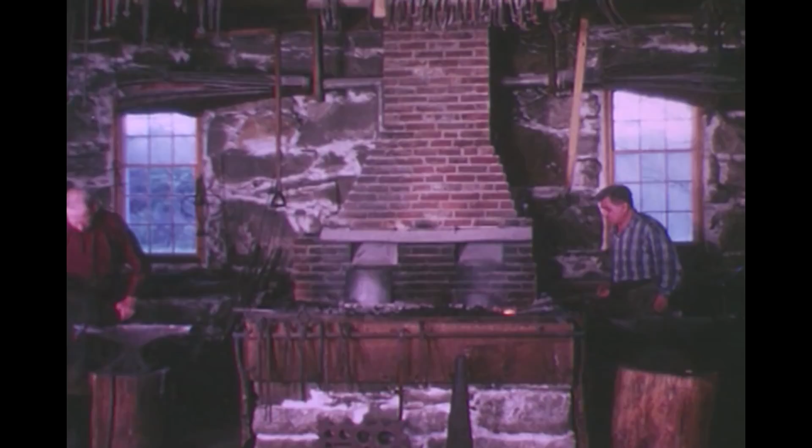Forging is one of our oldest metalworking arts. The old method of heating metal to cherry red has been developed into an exacting science, employing modern instruments and new metallurgical knowledge. Muscle power has been multiplied and is now measured in tons of force, which pound or squeeze all kinds of metals into a multitude of shapes.

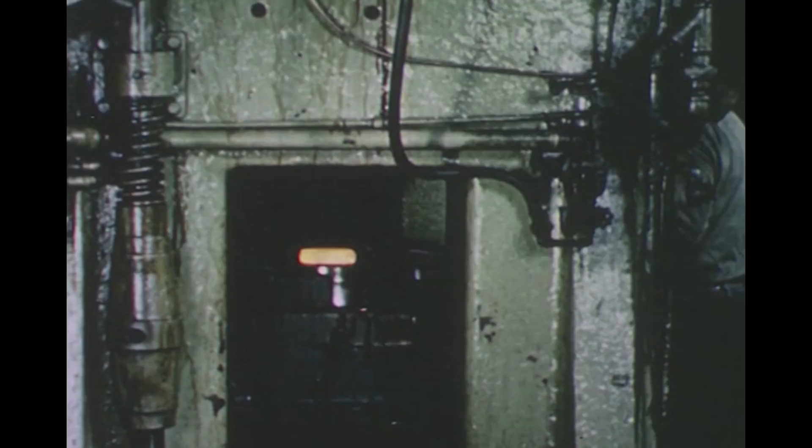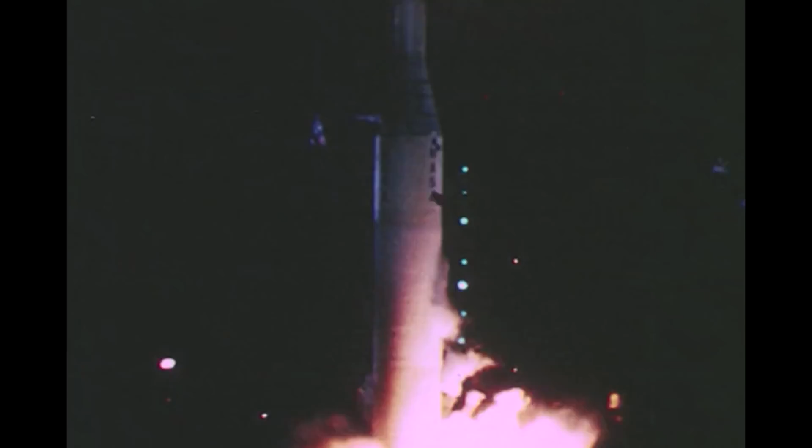The development of modern transportation has been furthered by advances in forging techniques. In our conquest of the air, forging knowledge and new kinds of forging equipment are providing components essential to efficient progress. And now, as we reach out into space, we are more than ever dependent on knowledge of metals and the techniques for forging lighter and stronger materials, new and unusual metals with new and unusual processes, so that we may then become the blacksmith for the stars.

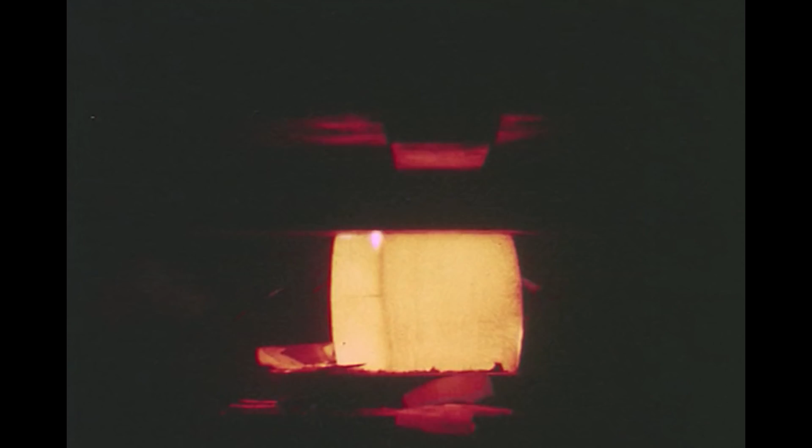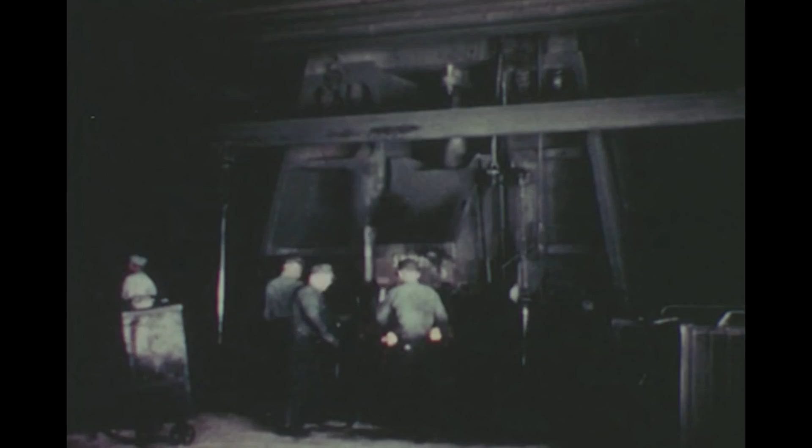For over 75 years, Wyman Gordon has pioneered in the forging industry. Experience, knowledge, and skill acquired since 1883 are combined with the latest in forging and scientific equipment to answer the forging problems of our atomic and satellite age, and to answer them today.

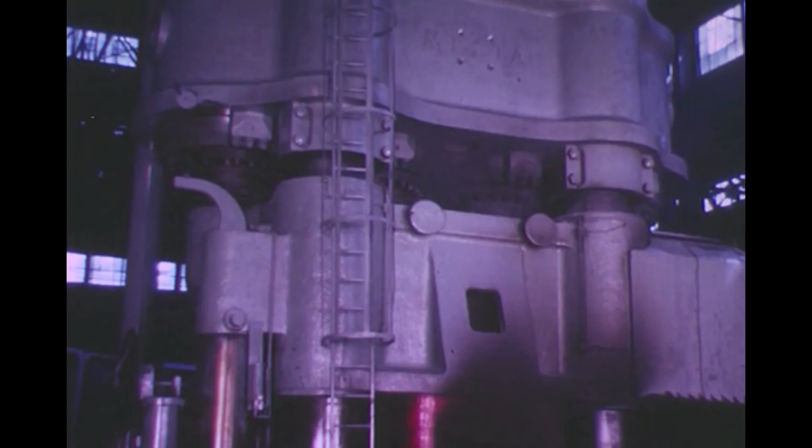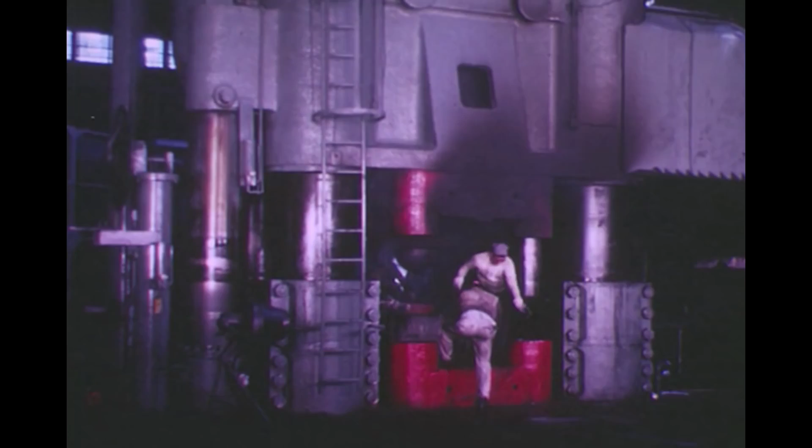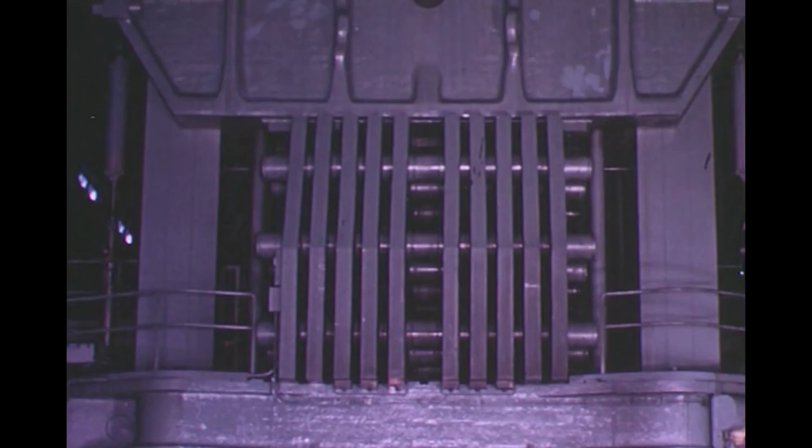In 1946, Wyman Gordon began operation of an 18,000-ton press for the Air Force in their North Grafton plant. This was the first of America's heavy presses to play a leading role in light metal forgings for aircraft. As the need for larger aircraft forgings became more evident, this 35,000-ton press was put into operation in 1955. This equipment provided a great increase in our country's capability for larger, stronger, and more intricate aircraft components.

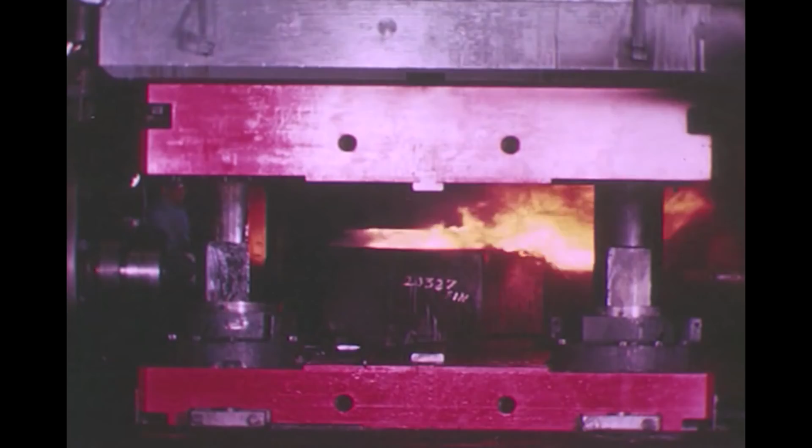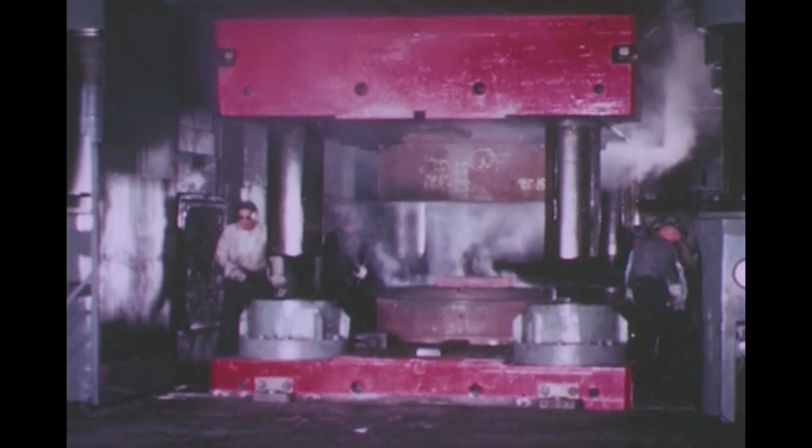Six months later, even greater capability was provided in the 50,000-ton press. These heavy presses were originally built to produce larger and more massive forgings of light alloy material. Increasing challenge came with the rapid growth of our missile program. To withstand the shock and stress of takeoff and supersonic speeds, the eroding fire of propellants, and the incandescent heat of atmospheric re-entry required a new family of materials. Wyman Gordon was ready with an extensive research and development program and with manufacturing capabilities and experience to accomplish the development of these new forgings of new materials.

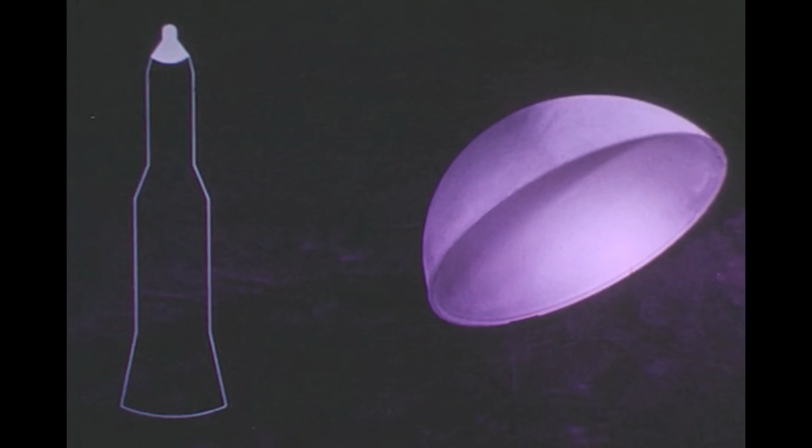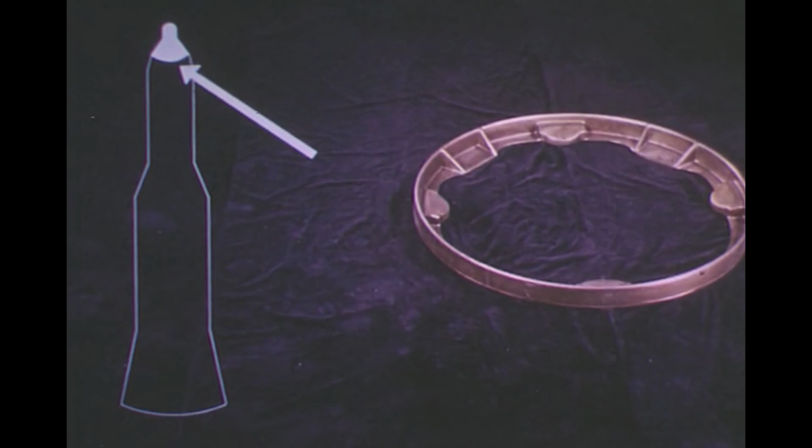Many components are already being forged for some of our well-known and successful missile and space vehicles. This missile nose component of beryllium is but one. Others include this dome forging of copper and a nose cone structure of magnesium. Components of aluminum and magnesium offer strength and light weight for the support of missile guidance systems. Many high-strength steel and titanium alloys are being forged today for rocket motor cases, such as these forward and aft closures for solid propellant motors.

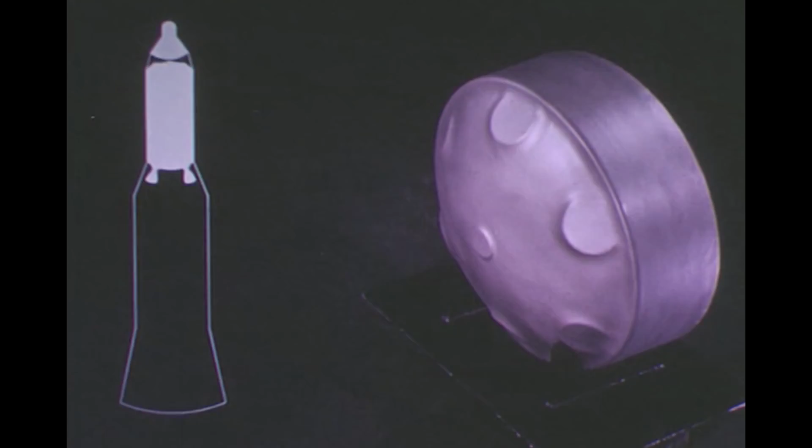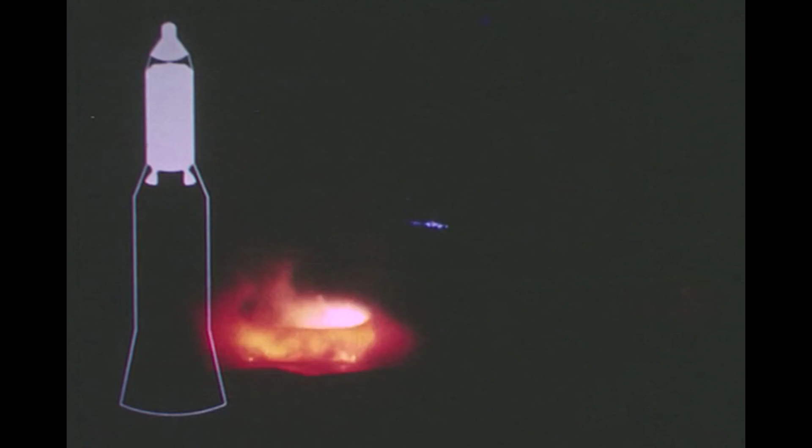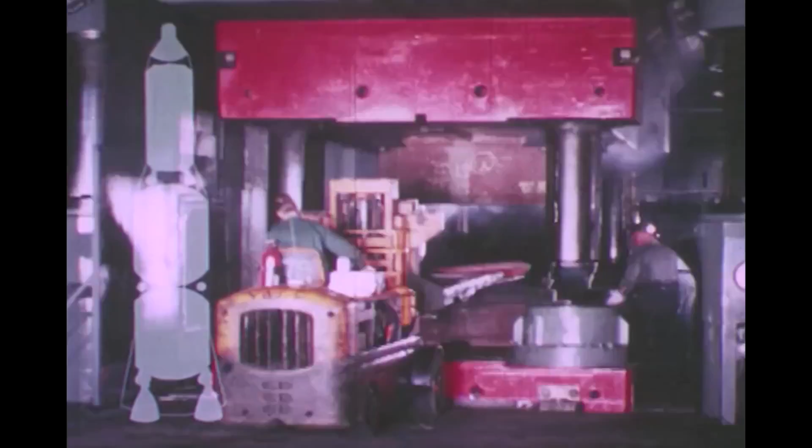Motor nozzle housings of titanium alloys are forged to provide a high strength-to-weight ratio. Refractory metals, such as molybdenum and tungsten, are forged for other nozzle applications. Liquid propellant tank parts, such as this aluminum bowl, are being currently forged, as are the parts of this titanium pressure vessel. Turbine engine parts are forged in high-strength nickel base alloys, such as this wheel of Rene 41 and this machined one of Astroloy.

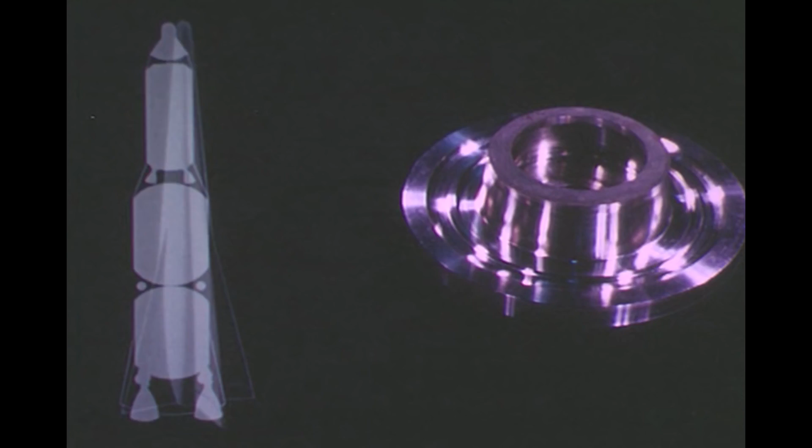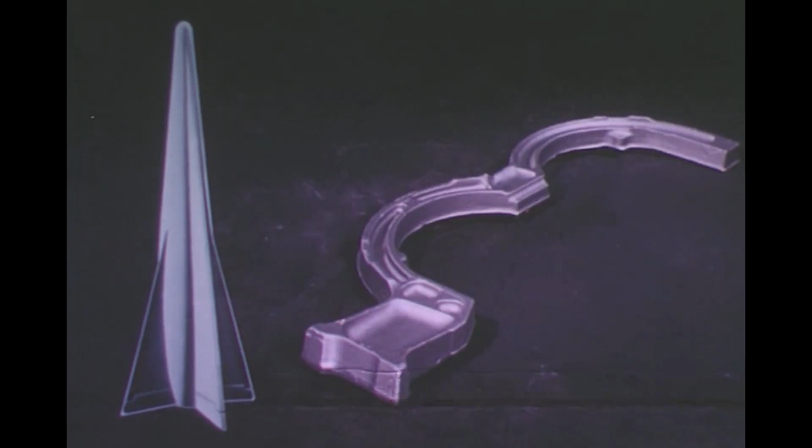Many other forgings are now being produced for the many missiles, rockets, and glide re-entry vehicles successfully proved and under development. And the list of metals includes magnesium, beryllium, aluminum, titanium, zirconium, steel, copper, columbium, tantalum, tungsten, and other nuclear and space materials.

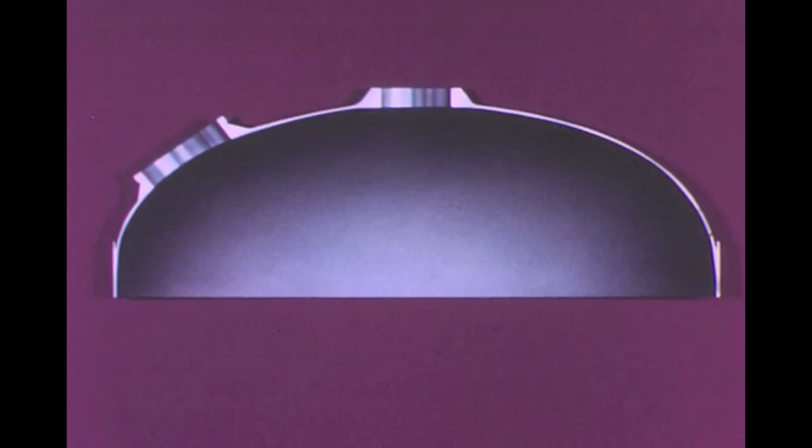The ultimate product performance requires partnership of experienced forging engineers with the product designers from the beginning of design activity. Wyman Gordon engineers, together with the customer engineering personnel, study the geometry of this model section of the forward head on a rocket motor casing of a long-range ballistic missile. Here they work backwards from the finished piece to the raw material which they will need to forge it. They review together the performance required, the metallurgical properties, the tolerances, the location of bosses, the surface finish requirements, and other essential characteristics of eventual design.

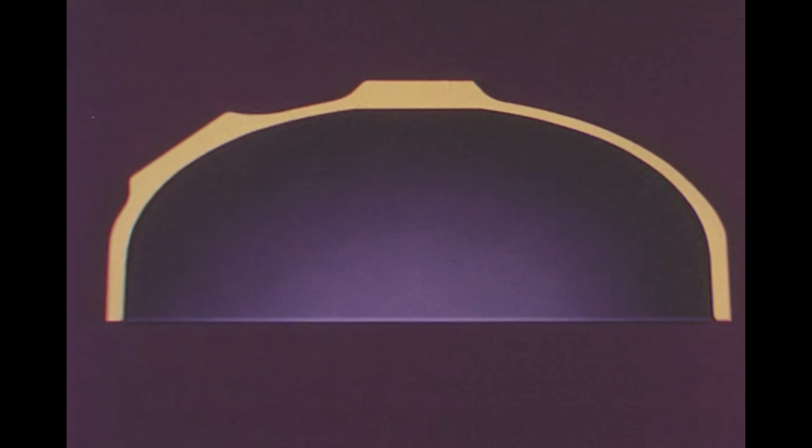Machining requirements are studied in advance. Experienced forging engineers must take into account the character of the forging processes as well as the end product requirements in order to provide the most effective forging design. The forging die designer, with his knowledge of metal deformation, determines the forging steps required to produce the part as well as the most appropriate size and shape of the beginning raw stock.

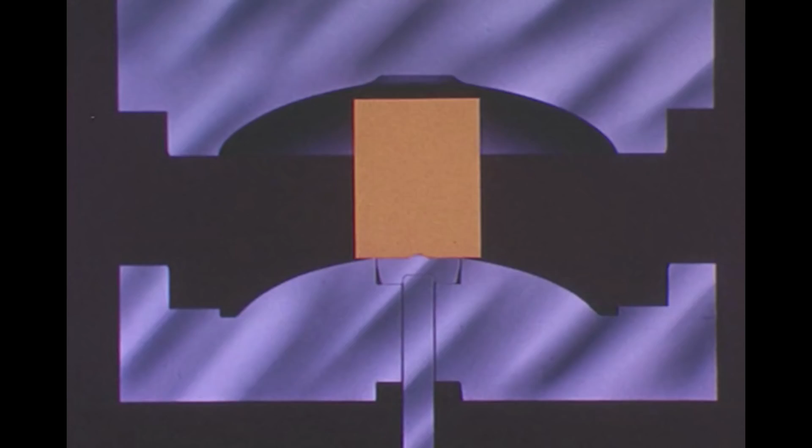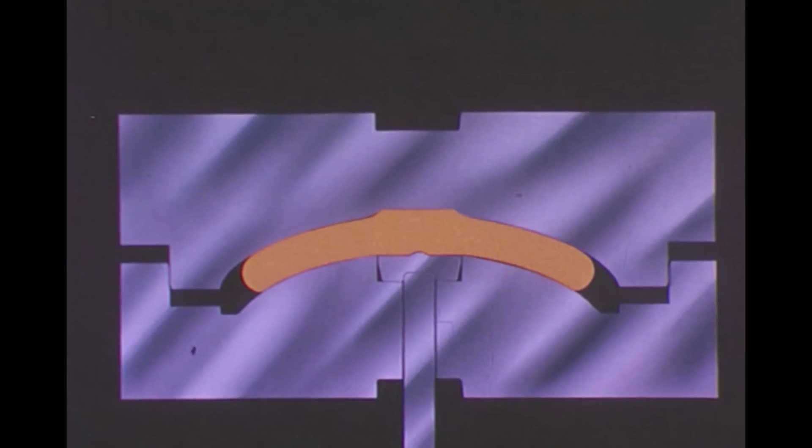Specific die designs are worked out by development teams consisting of personnel from the laboratory, engineering, forge shop, and die shop. All requirements of the job are considered, such as forging temperatures and pressures for each operation, and the amount of heating required. The engineers determined that this part would require 2 forging steps. The first set of dies perform a preliminary operation. Then a second set of dies perform the finished forging, providing a part which has all of the structural and metallurgical properties required.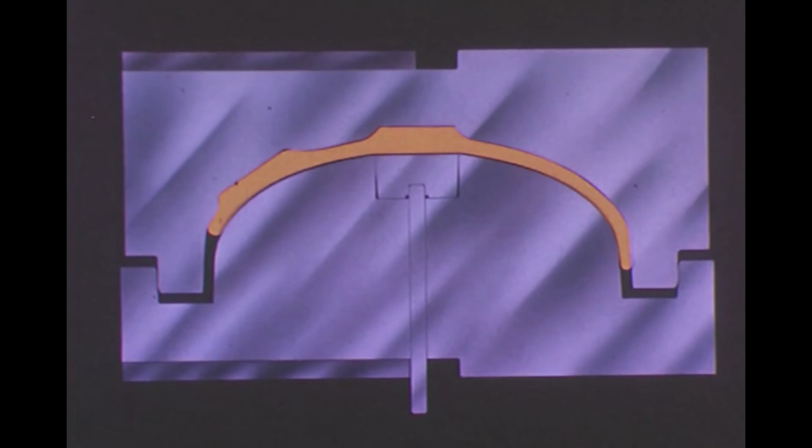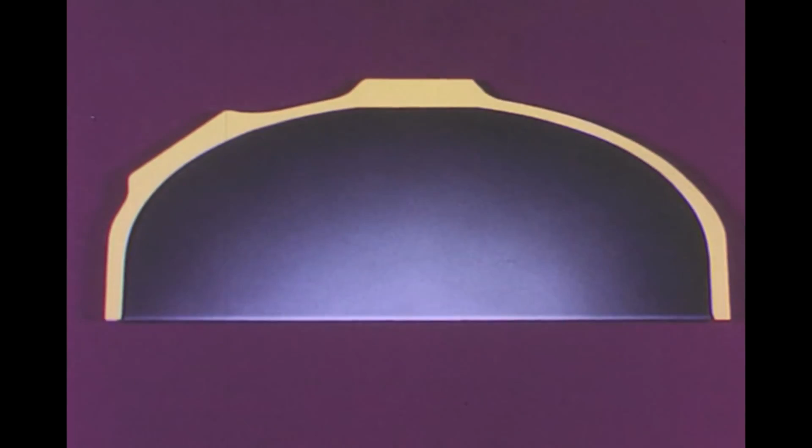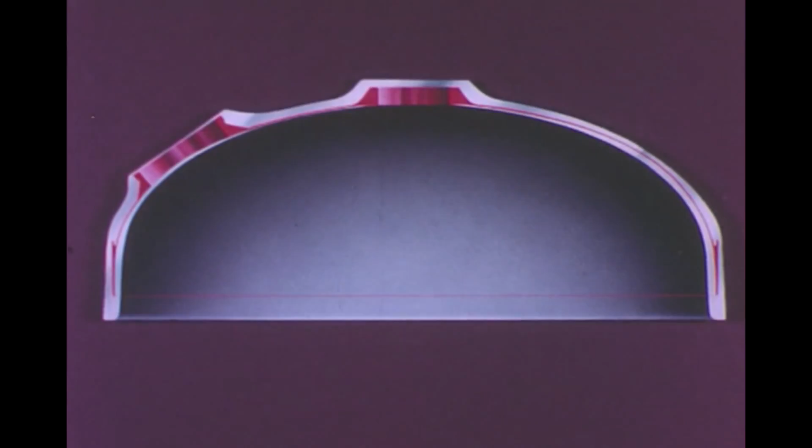Material at the rim of the bowl is removed for testing purposes, and the finished forging is machined to the required close tolerance. When missile engineers work with Wyman Gordon, from the research and development stages through to the final production, the best possible component can be produced, taking into account design requirements, material utilization, producibility, and total cost.

But to provide dependable forgings, many related activities must be tied together. The laboratory constantly analyzes raw material to be certain it meets all specifications. Difficult performance specifications and the high cost of many of the new metals being forged today require extensive testing of both raw material and finished forging.

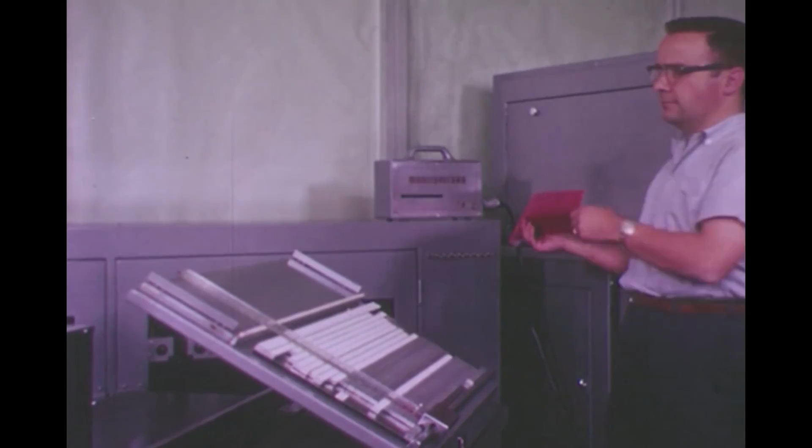Spectrography is one method used to determine the elements present in a material. By burning a sample and analyzing the light emitted, the direct reading spectrometer gives a permanent record of alloying or impurity elements. In addition to a chemical analysis to determine metal content, a sample is etched to check the macrostructure of the cast ingot or billet stock.

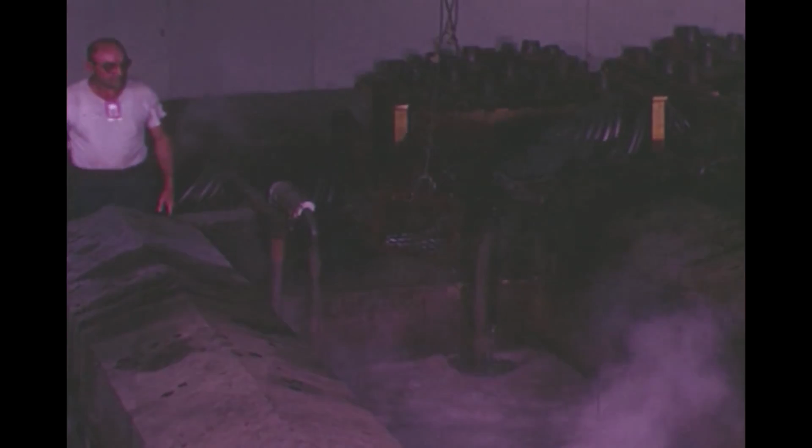Macro etching proves the absence of columnar grain, segregation of local areas of excessive alloying elements, metals or nonmetallics, or porosity due to gas entrapped in the material. These checks also help indicate how the material should be worked in preliminary operations to avoid internal rupturing or laps during forging.

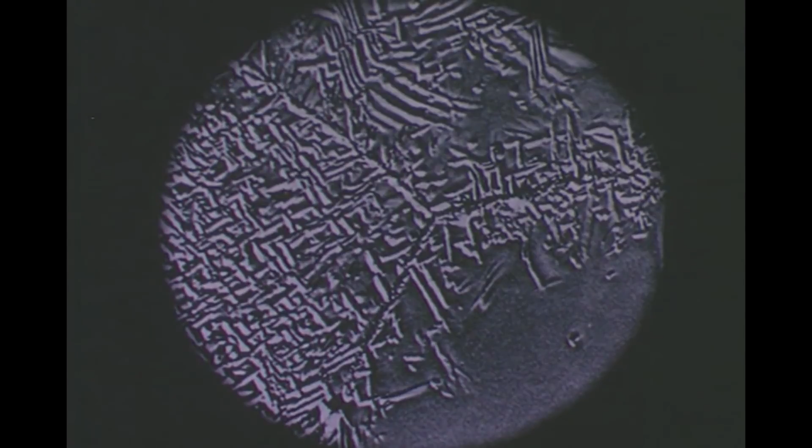The electron microscope is a metallurgical development tool used to study and evaluate the effects of processing variations on the structure of materials. These electron micrographs of a titanium alloy with an original magnification of 12,500 times show the structure and alignment of aging precipitate. This uniform, fine, randomly oriented precipitate indicates proper working and heat treatment.

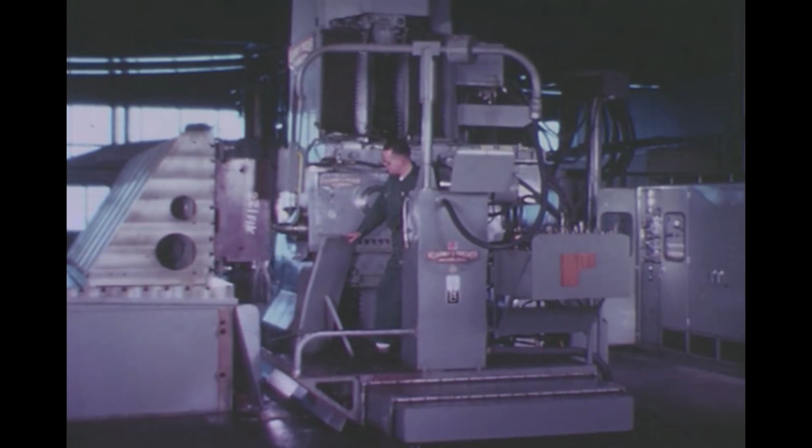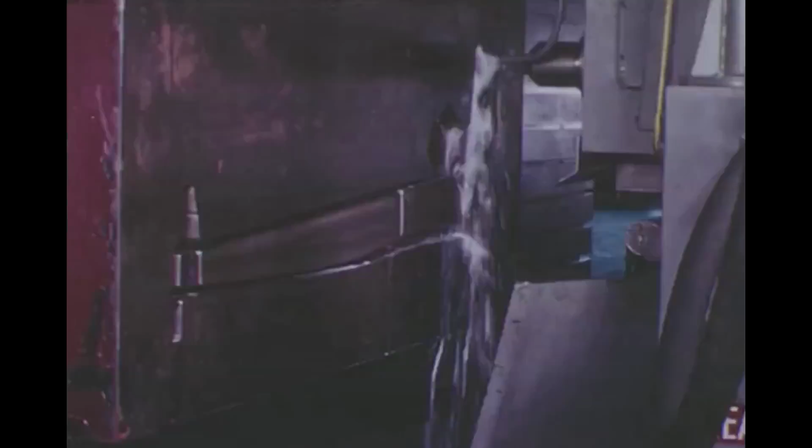While the raw material is being analyzed, carefully worked out die designs are turned over to the die department, where the forging dies are made by the most economical method. In some cases, a numerical, tape-controlled machine is used for sinking the dies. Dies are also prepared by electric discharge machining, electrochemical milling, and other more common methods of metal removal.

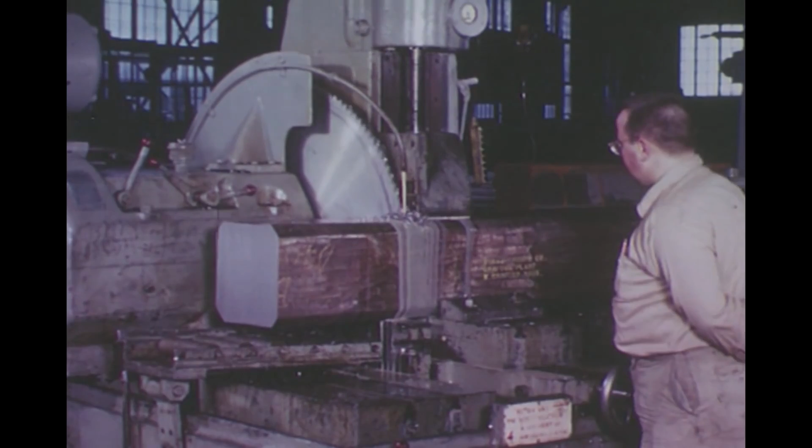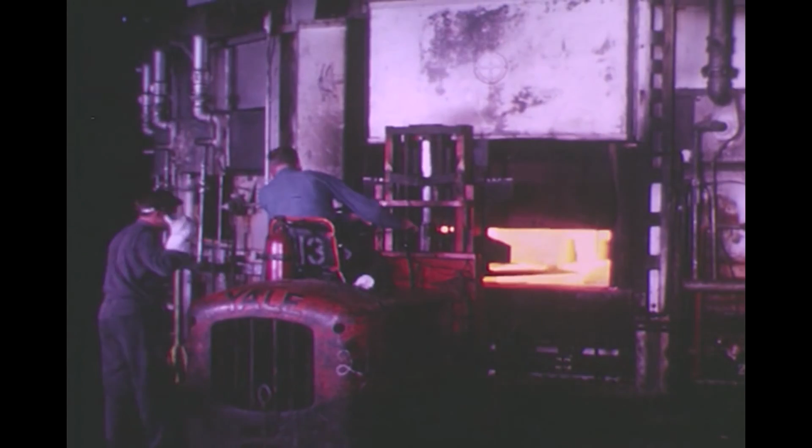Now, going on to actual manufacture of the forging itself, all the planning by product designers and Wyman Gordon engineers moves into the production stage. The billet of high-strength alloy steel, which has been thoroughly analyzed by the Quality Control Laboratory, is cut to appropriate size of raw material. The mults of raw material are heated to optimum forging temperature in carefully controlled gas-fired furnaces.

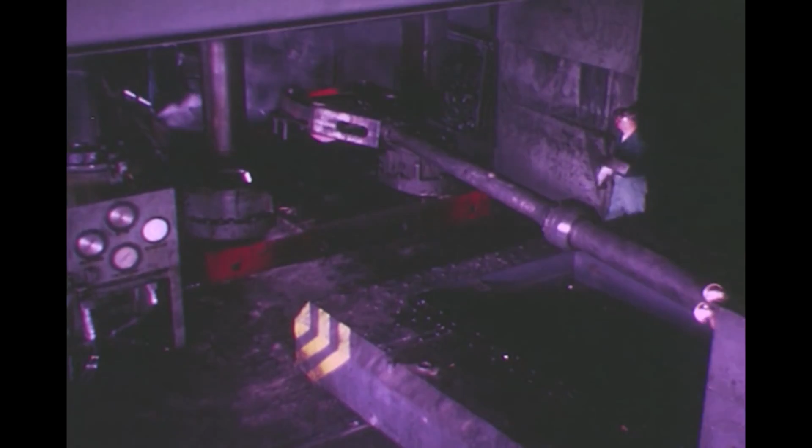Next, the raw material goes to one of the large presses for the first forging operation. Metallurgists and engineers decided on 2 closed die forging operations for this part because of the large amount of material movement.

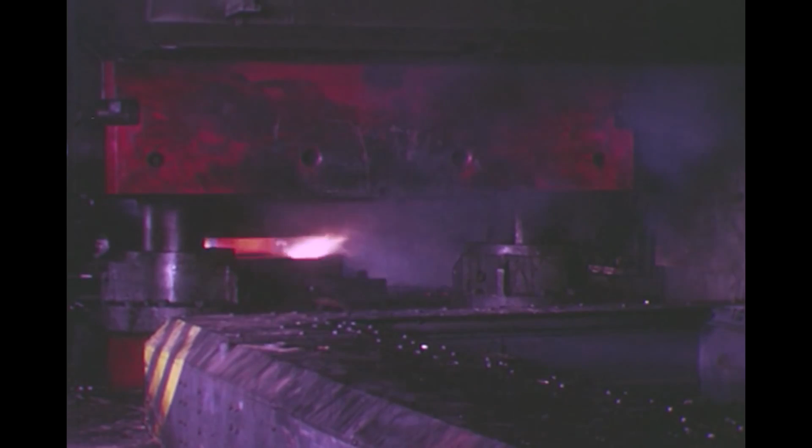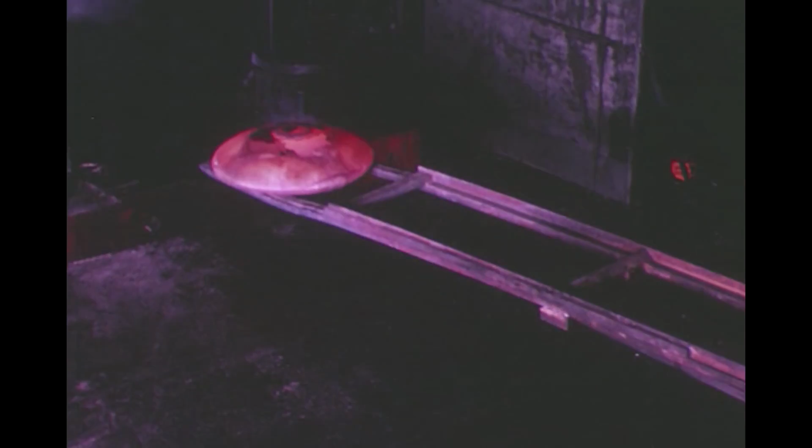When larger production runs are forged, material handling equipment is used to expedite the flow of work from furnaces to the presses. After a dimensional spot check, the piece is returned to the furnace for further heating for the finished forging operation. In this operation, material movement is completed so that all areas are filled and the final forging dimensions are achieved.

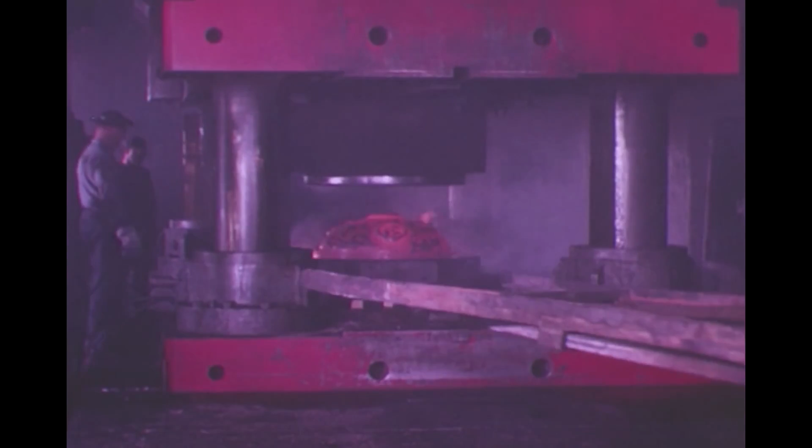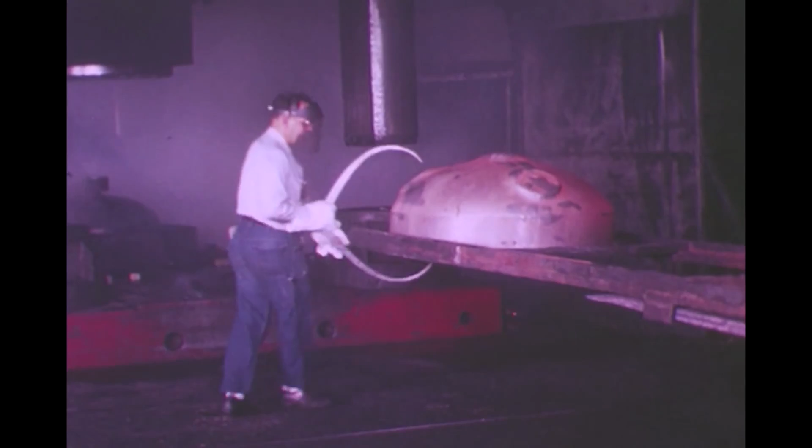As the piece comes out of the press, it is given a preliminary dimensional check. After the forging has cooled and been cleaned, it will be carefully inspected to be sure all geometrical relationships have been met, that web and wall thickness have been maintained, and that sufficient material is available for an integral test.

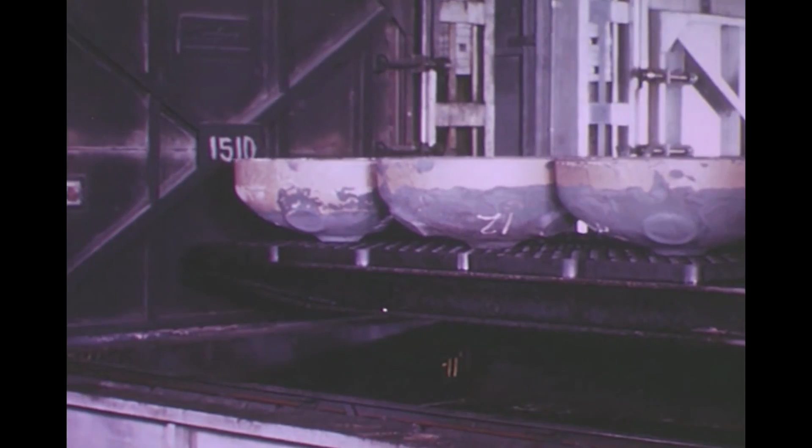To attain the desired metallurgical and mechanical properties in the finished part, each forging is subjected to a carefully controlled heat treating cycle.

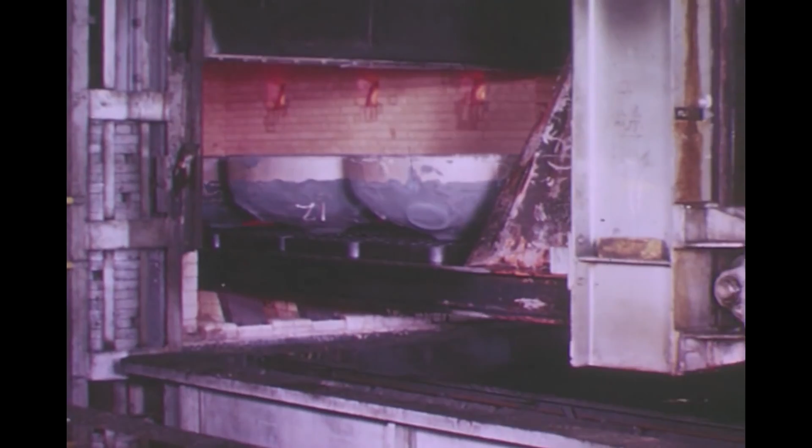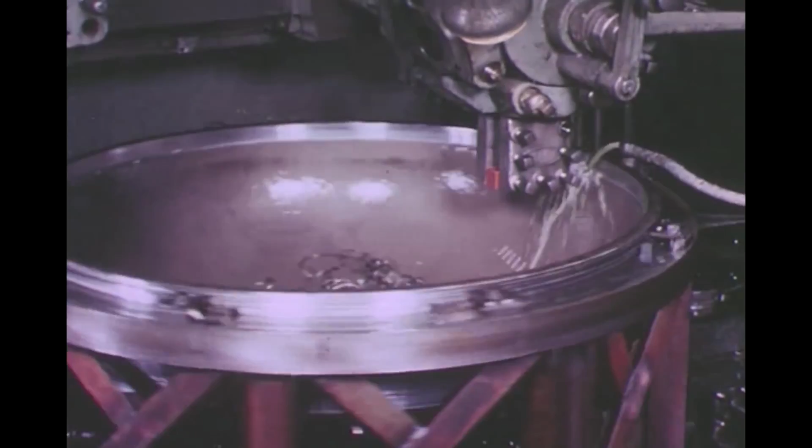Wyman Gordon maintains extensive facilities for the machining of forgings. In many cases, machining is necessary during various stages of the forging process to assure optimum mechanical properties. In other cases, complete machining is a service to the customer, as well as a further guarantee of the finished part's quality. One of the machining operations is the cutting off of the extra material which the engineers included for an integral test piece. This will be cut up for tensile and stress rupture testing.

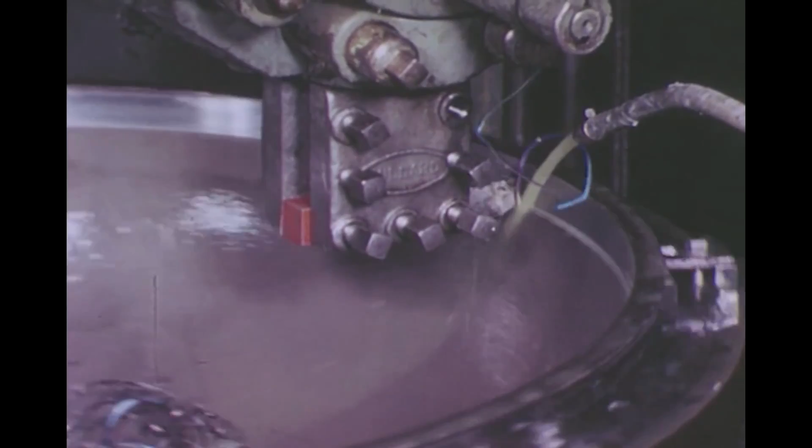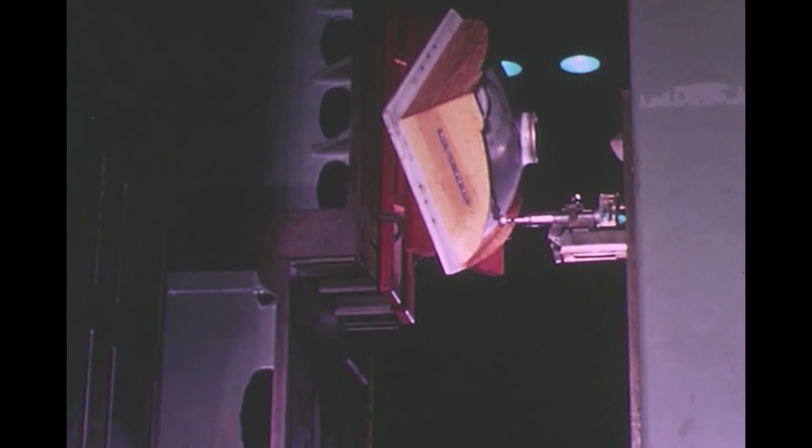Here, the machining of the dome-shaped contours of this missile closure is accomplished by a duplicating machine. A tracer follows the contours of the model and controls the milling cutter so as to reproduce the same contour on the finished forging.

In this case, a vertical boring mill has been adapted to turn the contours around the bosses. The part is mounted on a rotating table, and the cutting tool holder moves up and down, controlled by a cam and roller, the cam being designed to produce the desired contours.

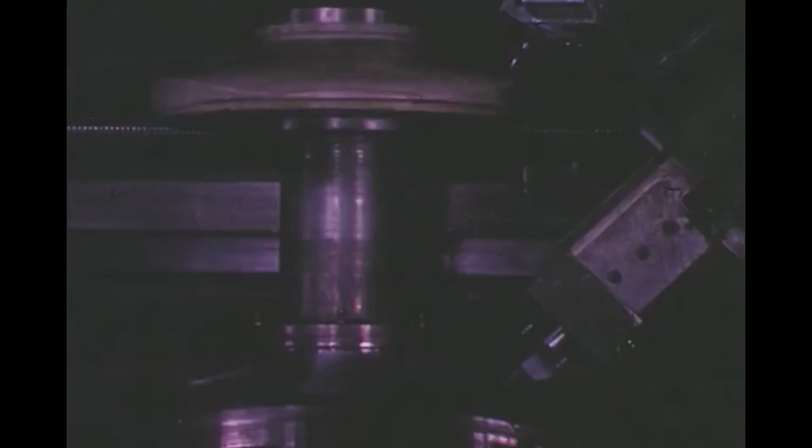After machining, the parts are subjected to rigorous product inspection. This is a Vidigauge, a direct reading ultrasonic resonance method of measuring wall thickness from one side. The reflection of sound waves from the first surface is indicated on the screen by the blip on the left, and the back surface reflection is indicated by the blip on the right. The distance between the two is a measure of the thickness of the part.

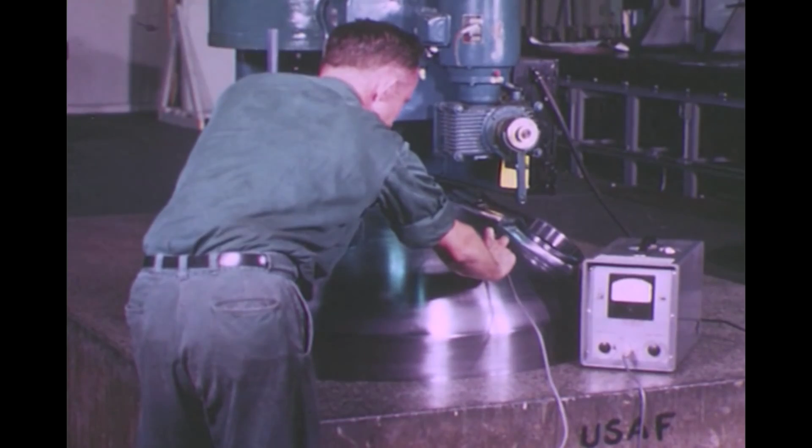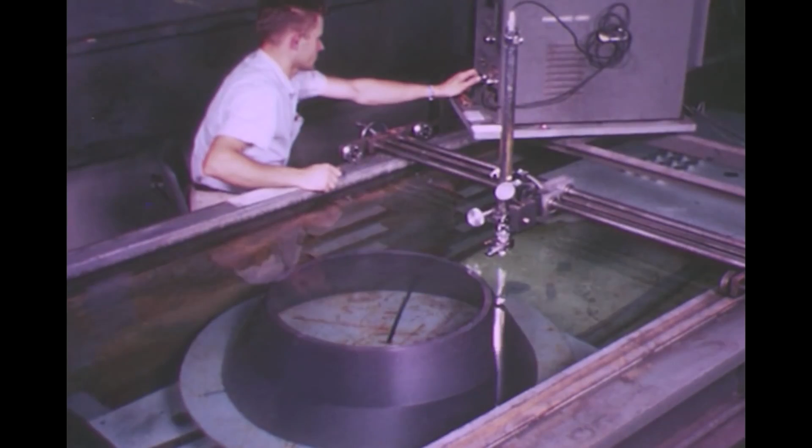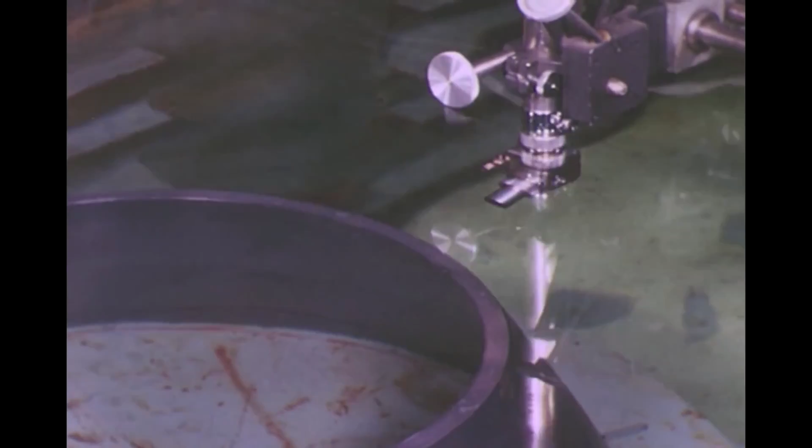The condition of the machined surfaces is also checked with a profilometer to be sure the micro-inch finish meets specifications. Many forgings are given a sonic inspection to check internal soundness. The part is immersed in water while ultrasonic waves are transmitted through the part. If there are any mechanical discontinuities, voids, or inclusions within the forging, they will change the pattern of the waves reflected back to the screen.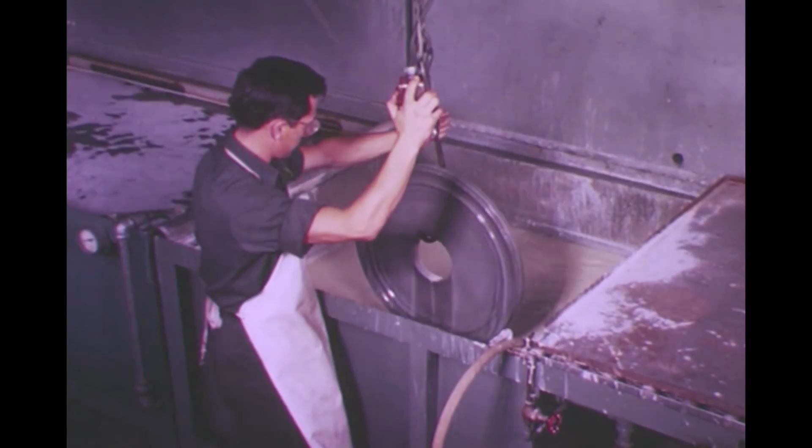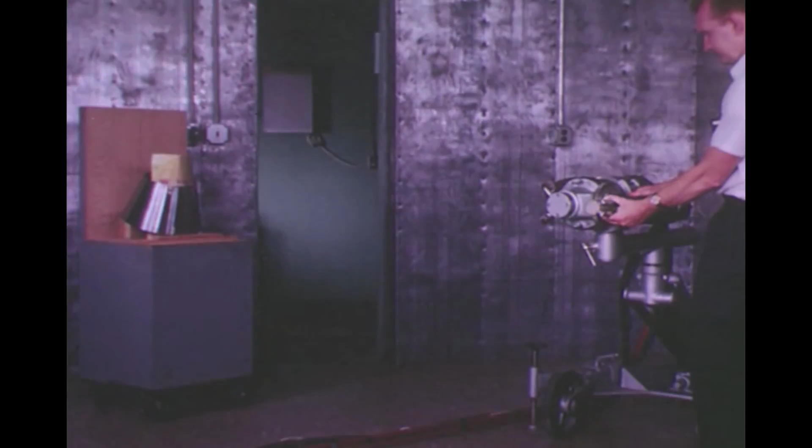Many forgings receive Zyglo inspection for possible surface defects. The forgings are immersed in a fluorescent penetrant which finds its way into minute cracks or laps in the surface. After the forgings have been washed and dried, they are examined under ultraviolet light. Certain forgings are given a radiographic or X-ray examination.

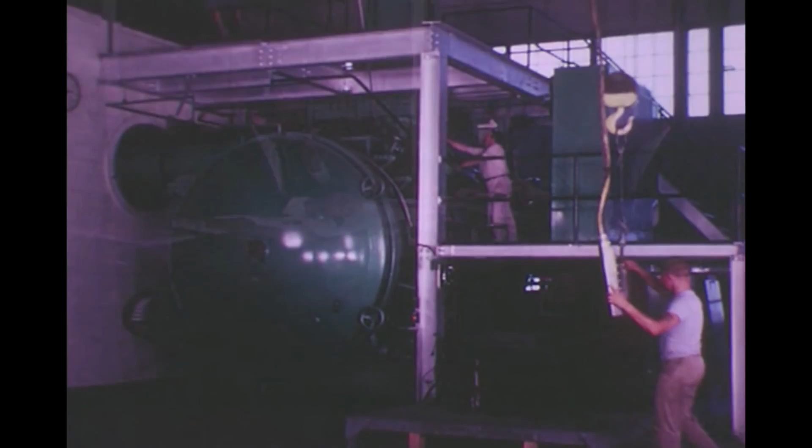Wyman Gordon is continually searching for new and better materials and techniques to meet the challenge of the space age. One of the contributions of this program is the development of metallurgically sound, uniform, and stable materials. A complete induction vacuum melt facility makes possible the limited production of carefully controlled alloys. Basic metals can be accurately combined to provide forging ingots of super-strength steels, nickel base, cobalt base, and other heat-resistant alloys.

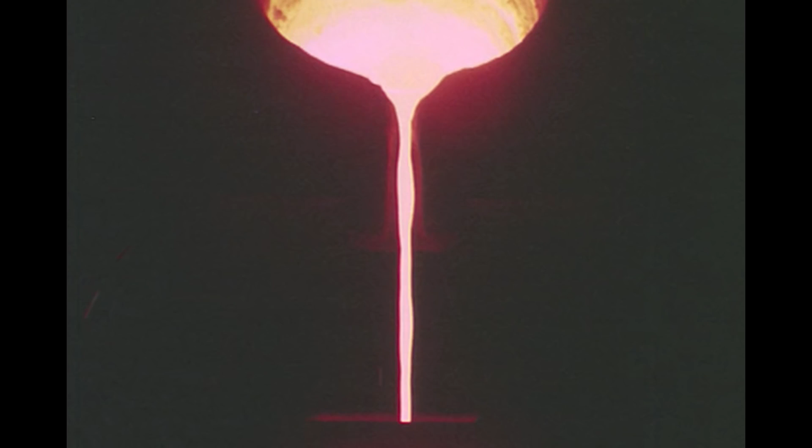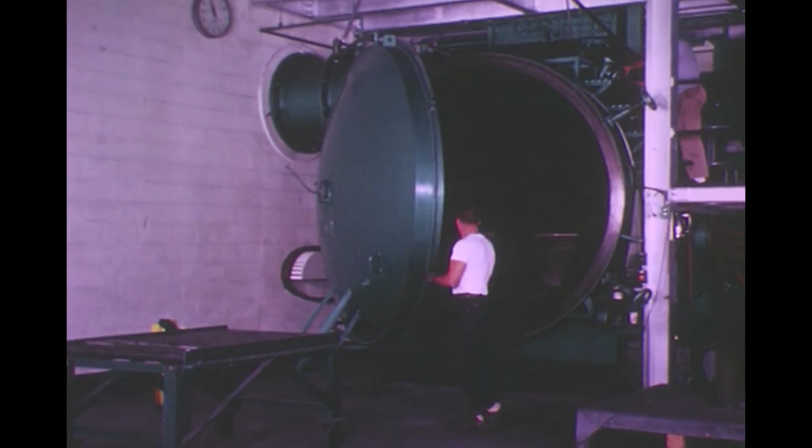Thus, the Research and Development Group can experimentally forge materials prepared to their own formulation and evaluate the results of using metals and alloys that are otherwise unavailable. Our nation's success in the space age in overcoming the problems of stress and heat, of launching and re-entry, may well come from research effort such as this.

Extensive effort is being expended to produce domes and closures of titanium alloys by closed die forging. The cryogenic properties of this material, with its high strength-to-weight ratio, provide reliable forgings which are resistant to corrosion and thermal shock.

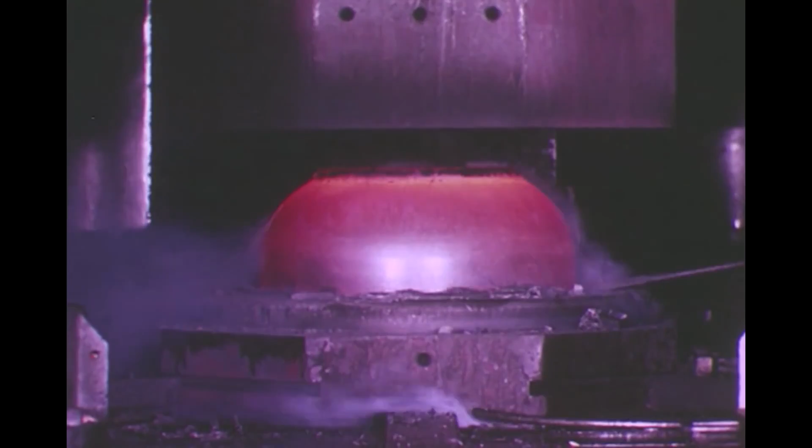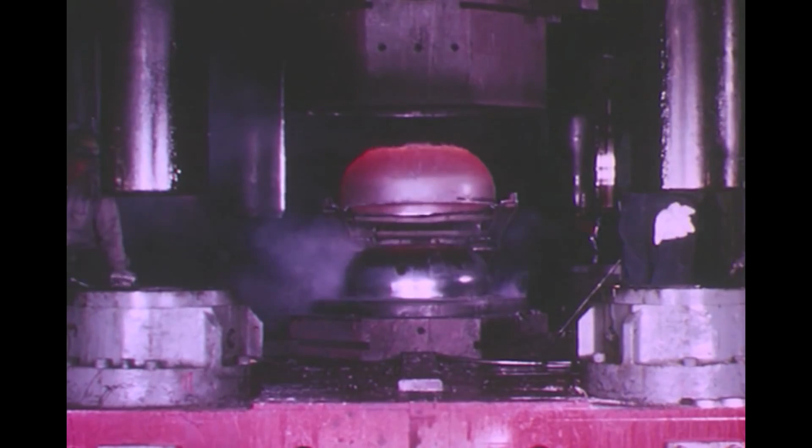Alloy steels offer high strength when forged into domes and closures for solid propellant motor casings or liquid propellant tanks. The complex stresses of this type of closure call for a high strength-to-weight ratio. Forgings of these materials have proven reliability.

Turbine wheels for liquid propellant systems are another critical requirement successfully met with special nickel-base alloys. These materials are continually being evaluated and have been successfully forged into turbine wheels up to 50 inches in diameter and into closures up to 65 inches.

Many other forging development programs are underway for other materials such as tungsten, tantalum, molybdenum, and columbium. This 1,300-pound ingot of columbium is being pancaked for forging into a bowl. Special coatings are employed to insulate, lubricate, and prevent contamination during the forging process.

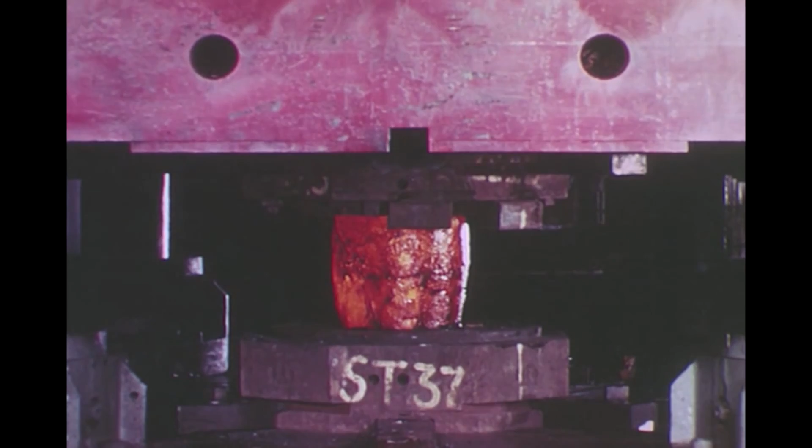Nozzle liners and throat inserts for rocket motor nozzle bodies are currently being hammer forged of molybdenum. Experience is proving that forged components of refractory materials such as this have outstanding reliability and resistance to erosion and thermal shock.

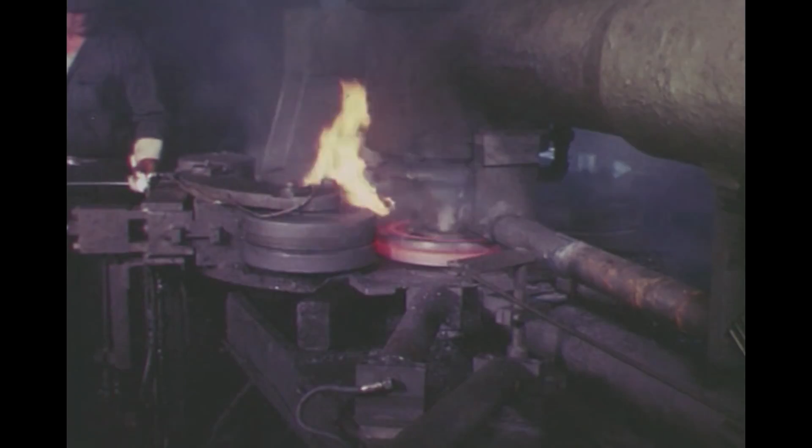Other manufacturing capabilities include ring rolling of various alloys. Wyman Gordon equipment and personnel cover a wide range of facilities and experience to produce the greatest number and largest variety of forgings for aircraft and missiles.

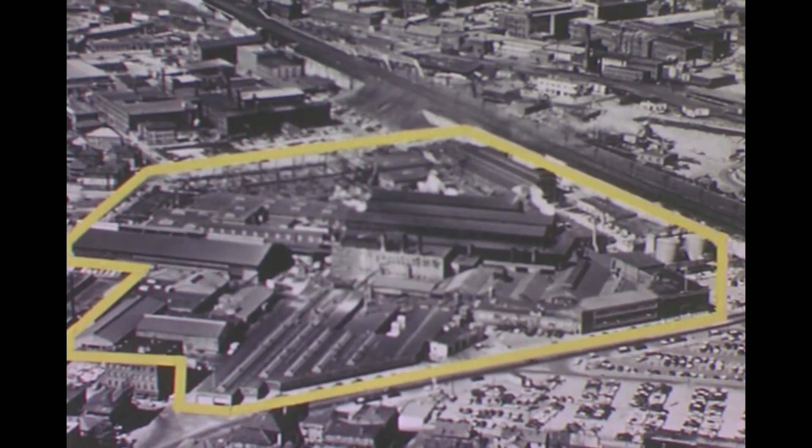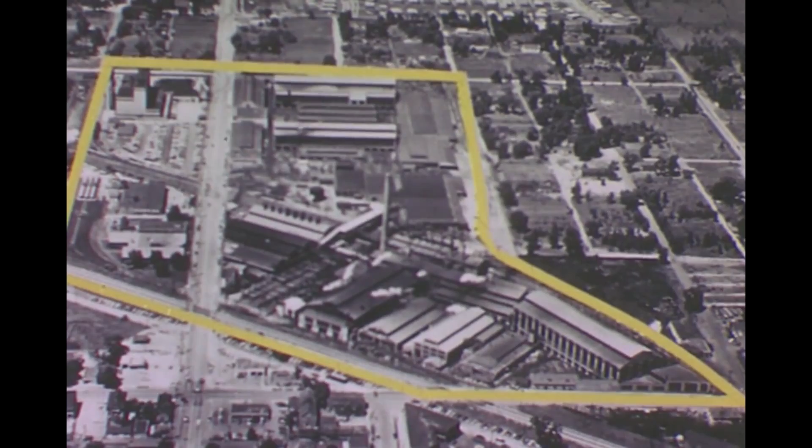In its Worcester, Massachusetts plant, Wyman Gordon operates a wide variety of press and hammer equipment. At Harvey, Illinois, is a plant specializing in crankshafts with facilities to produce a variety of other forgings as well. At North Grafton, Massachusetts, are 11 presses ranging from 600 to 50,000 tons in a facility built by the United States Air Force and operated by Wyman Gordon.

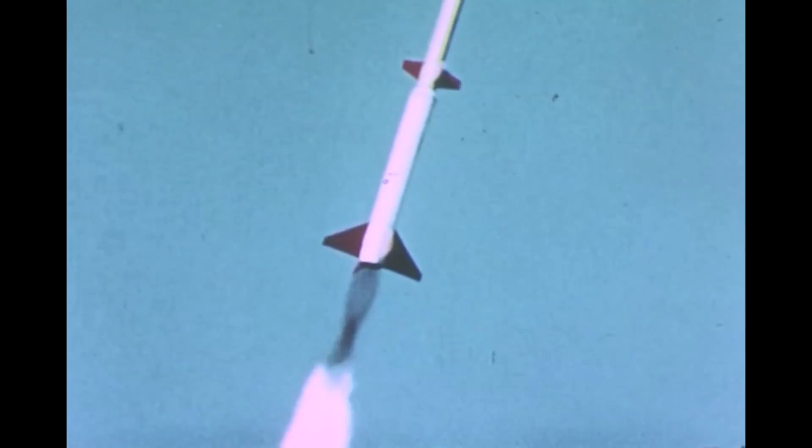The combined capabilities, experience, and facilities of the entire organization are available to produce missile components in closed die and hammer forgings from any workable metal. Our team of sales engineers, metallurgists, and product engineers are available to help solve missile and vehicle problems from research and development stages through to the final machining of components.

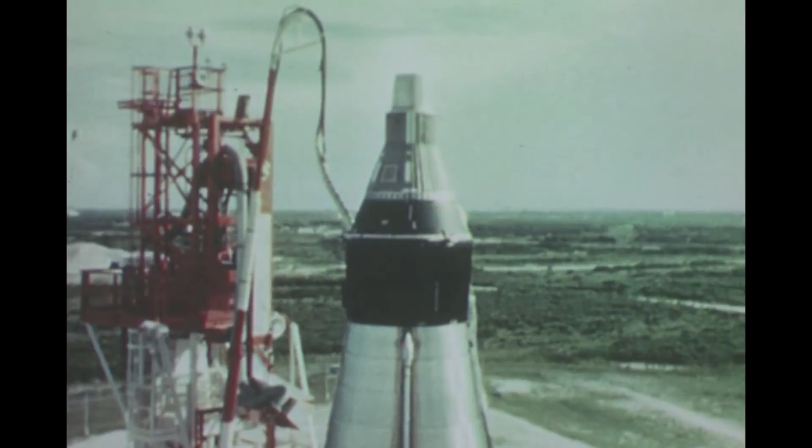Experience, knowledge, and skills of over 75 years as pioneers in forging are combined to develop answers to man's conquest of space as Wyman Gordon becomes the blacksmith for the stars.